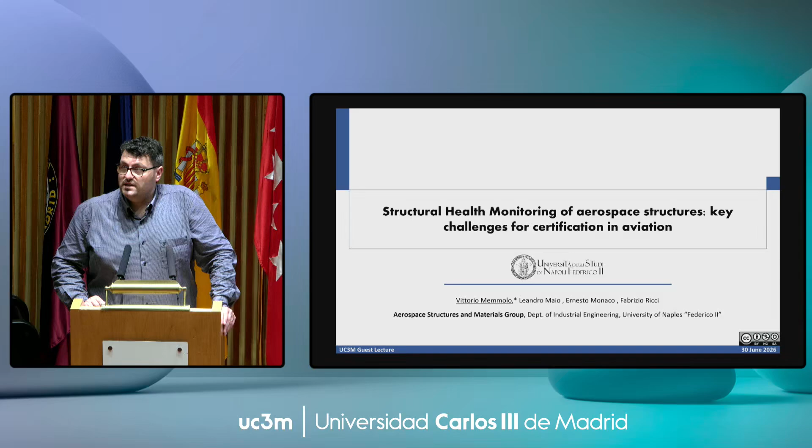I will basically touch on some of the activities we are conducting on SHM, structural monitoring, and I would like here also to give credit to some of my colleagues with whom I'm working for more or less 10 years. My intention is to move from first some methodological aspects to then put the accent on certification related challenges when we are talking about structural monitoring in aviation.

What I will introduce here is just a brief introduction about myself, the motivation for having SHM within aviation and specifically for the airframe, some approach based on guided ultrasonic waves, which is the methodology we mostly use based on ultrasound, some challenges for industrial deployment, specifically within a regulated environment like aerospace, before giving some concluding remarks and hopefully a brief discussion with you.

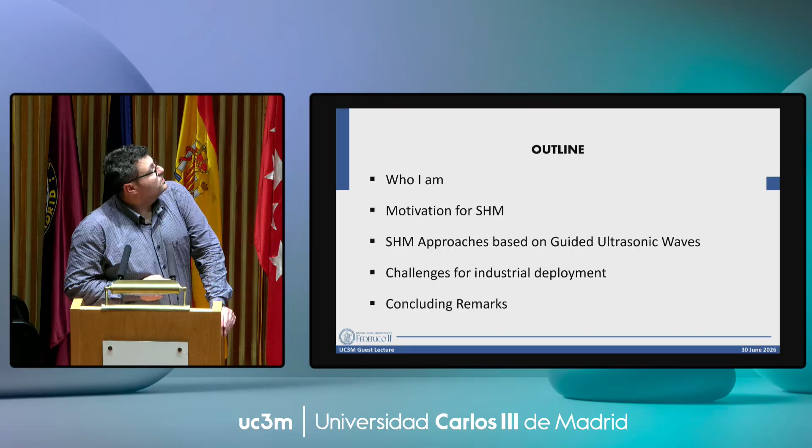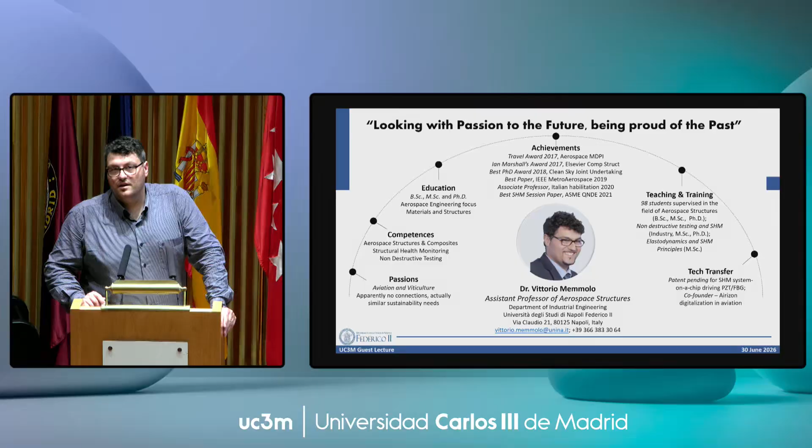Just about myself, as Alberto said, I am assistant professor in Naples. This is just a brief overview. I actually got my Bachelor of Science, Master of Science, and PhD in Naples. Then I traveled around a little bit, but I was mostly working there since 2013.

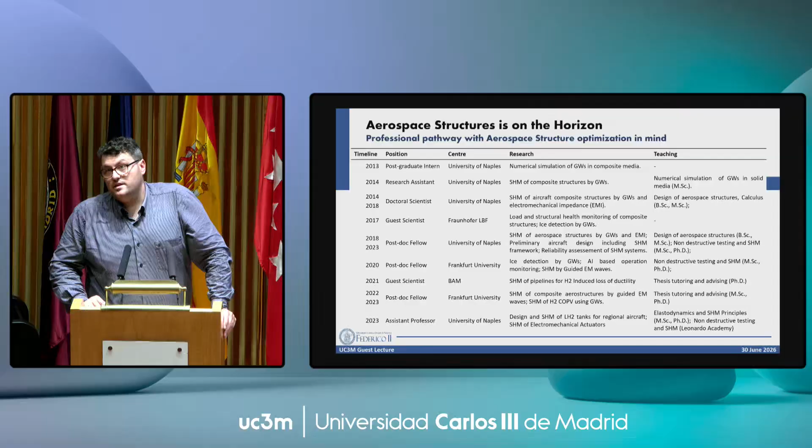This is basically my track, starting as postgraduate intern, research assistant, doctoral student. Then I moved to Fraunhofer for a while, back to Naples, then back to Germany. I am in love actually with Germany. I spent a lot of time there at Fraunhofer, Frankfurt University, BAM, which is a Federal Institute for Material Research, and DLR recently, which is not mentioned here.

This is actually an overview of what was my career related to SHM. Actually, the leitmotif is not SHM, but ultrasound. We started using ultrasound in 2013. Probably some of you are familiar with ultrasound for non-destructive testing. The concept is very similar, but adapted, of course, to having a system permanently connected and attached to the airframe.

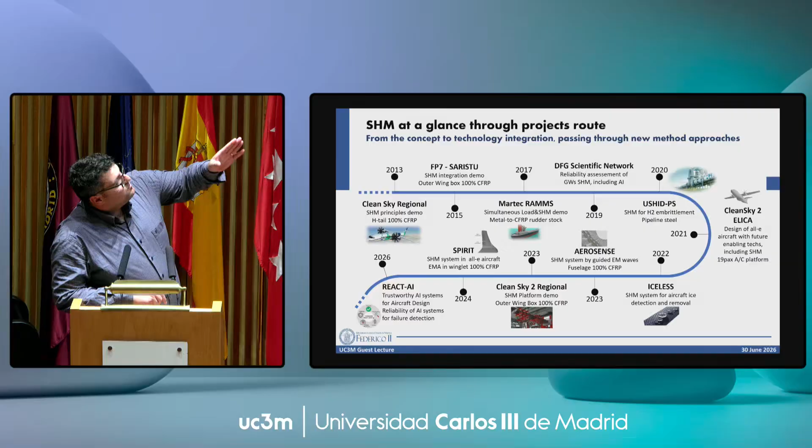We moved from some European projects where we tested SHM on a horizontal tail, full composite especially, applying also to maritime problems, and moving to hydrogen. Also for hydrogen, we need to monitor structures which are not specifically aerospace, but sometimes just pipelines, but still SHM can be imported there.

Then we extended our competencies using ultrasound, specifically actuators, for something a little bit more exotic, let me say, hydrogen production by water, so sonolysis using ultrasound as well. The process is very similar. You still use ultrasound to activate something in the structure, as we will see later.

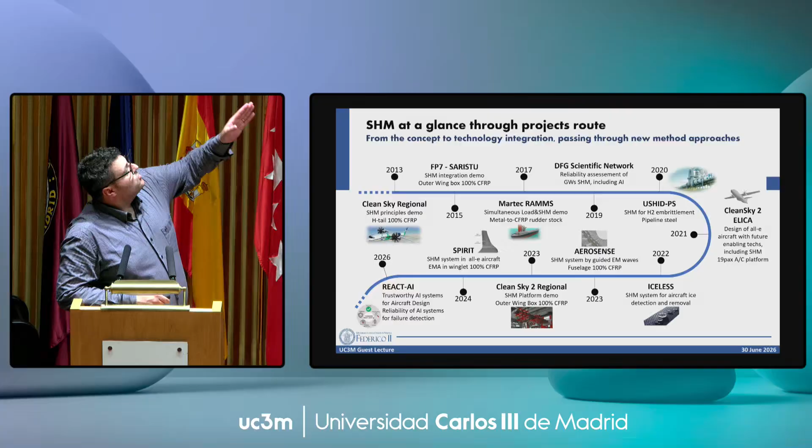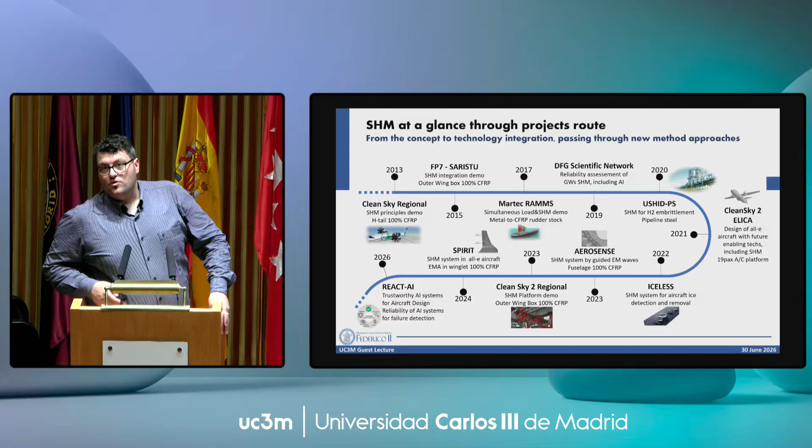And now we are moving to higher TRL, but also to making the system more integrated, which is the reason why the accent at the end will be posed on certification aspects, because whenever you want to increase the TRL at a certain point, you also have to qualify or certify your system. And of course, now we are going very deep into AI, which I will have to omit today, but if you have any curiosity, we can discuss further.

Why SHM? Structural monitoring is a little bit different from non-destructive testing. With non-destructive testing, the aim is to test a specimen, test a part of an airframe, for instance, and verify whether there is damage or not. This is usually already a scheduled maintenance activity.

Sometimes what happens, if we're considering a metallic structure, is that there is a crack, and the crack can propagate wherever and whenever you fly. You will fly in an aircraft full of cracks - I don't know if you're aware of that, but that's the reality. What's very important is to monitor the crack propagation, because otherwise the airframe could be unsafe. That's the reason why there are scheduled inspections.

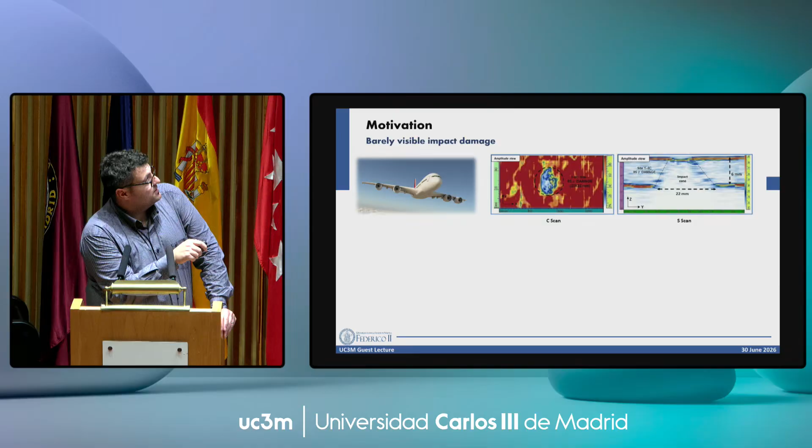The same happens for composites. Composites are more fatigue resistant than metallic structures for sure, but they are still very fragile with respect to impact. Whenever there is an impact, especially in the front part or on the lower wing panels, and if you have a composite, a non-destructive inspection based on ultrasound can show that the structure looks intact, but at that place, especially where there is an impact, there is a big damage. And if you inspect the composite through the thickness, there is a big failure.

So all the composite laminas are disconnected from each other. This is very critical because whenever you are supposing to work with a pristine structure, you actually have a big damage, and the residual strength gets much lower.

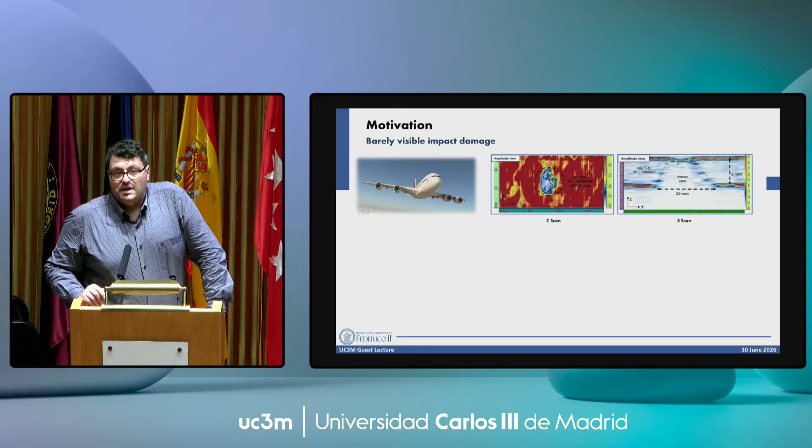This is the reason why non-destructive testing is very important, especially in damage tolerance design and maintenance philosophy, but it's very expensive. Basically, whenever you are designing, especially a composite structure, the damage tolerance approach requires that wherever you have a specific damage that can be detected in production, usually a bigger damage can be detected during operation in situ, which is much bigger than what you can see right after manufacturing.

Between these - the minimum detectable damage on site during the lifetime, and the maximum allowable damage - you need, by certification authorities, at least 2 following inspections, because there's always the possibility that you cannot detect the damage.

In addition, you have to demonstrate, especially for composites, that the capabilities after an impact like that, under compression, are still satisfied until ultimate load. And you don't need to have delamination grow between the 2 inspections we've seen here. Otherwise, you have to replace or repair the component.

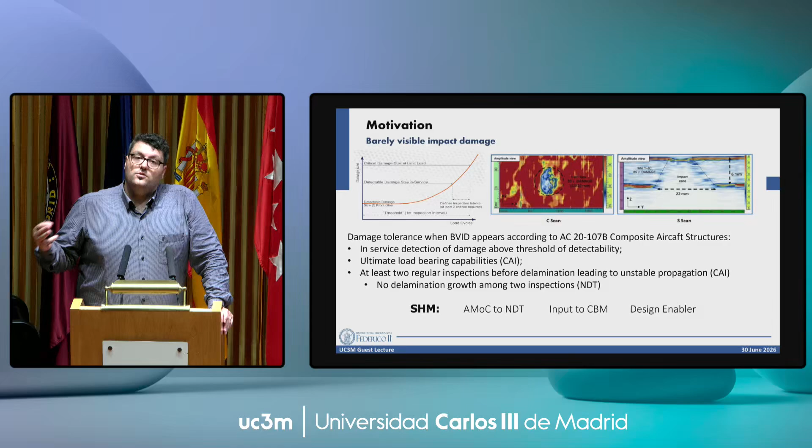This is very demanding from a maintenance point of view, and that's the reason why SHM comes into play as a key enabling technology. SHM can basically be seen as an extension of non-destructive testing, where instead of having equipment with which you inspect the structure, you have a number of transducers permanently installed on the structure, which are used to retrieve information about the actual structural state.

When we talk about SHM, we can use it as an alternative method of compliance to non-destructive testing, as an input to condition-based maintenance, or as a design enabler. Here, basically, we replace the NDT inspection with some SHM interrogation, so you use the data from the sensor to understand whether there is damage or not.

As input to CBM, basically, we want to move from a scheduled inspection approach to a predictive inspection approach. So you basically perform the maintenance activity whenever you actually know there is a damage or there is a high probability of having one.

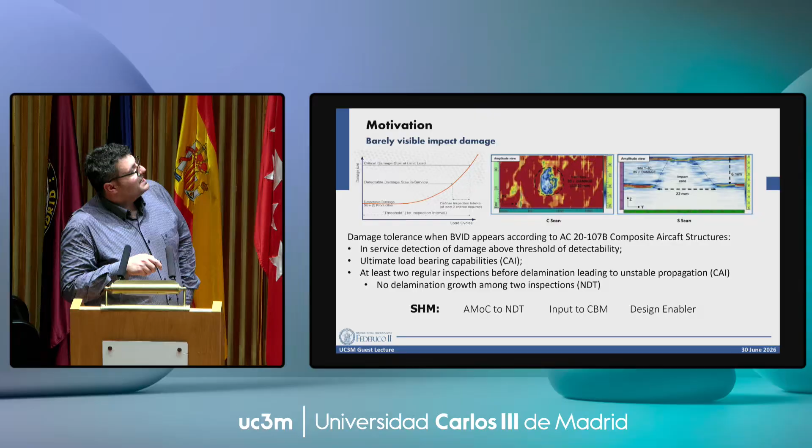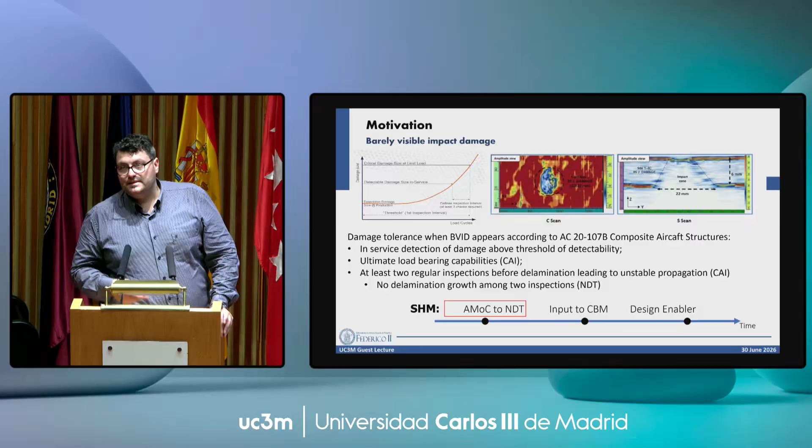As a design enabler - that's basically our dream for anyone working in SHM - the idea is to make the design of composite structures less constrained, because especially when we're talking about knockdown factors, it's very hard to deal with this type of damage, which are barely visible impact damages. Of course, design enabler is far from today, but today we are mostly discussing SHM as an alternative means, or a method of compliance to NDT.

Whenever we talk about maintenance inspection, we're usually discussing a very long process which starts from the captain or the first officer doing the turnaround around the aircraft to check if there's something that doesn't work. If everything is okay, then usually you fly. Otherwise, you ask for a level 1 NDI inspection, which is available at larger airports. If there's still an issue, there's usually a detailed inspection or detailed visual inspection.

If something is considered very risky, then you need a level 2 NDT inspector to come, and this is not available everywhere. When we move to this phase, as an operator we are already spending a lot of money before even understanding if we have to repair or we can release the aircraft.

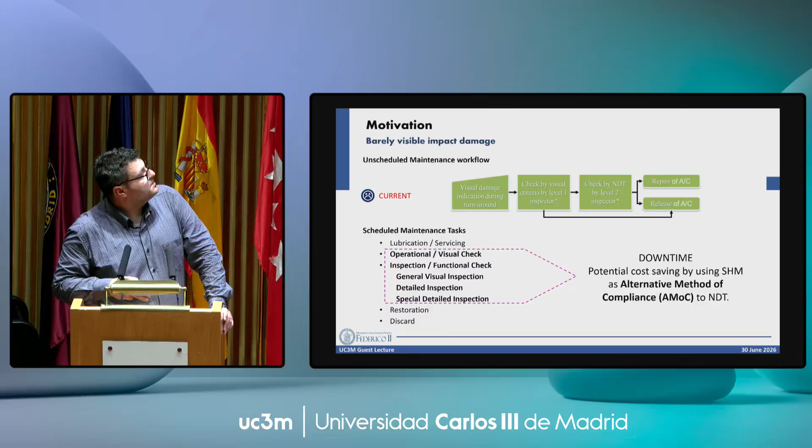All these aspects like operational visual check, functional check, detailed inspection, and special detailed inspection increase downtime a lot. Of course they produce a lot of downtime because the aircraft is on the ground, and this can be strongly reduced by integrating SHM as an alternative method of compliance to NDT.

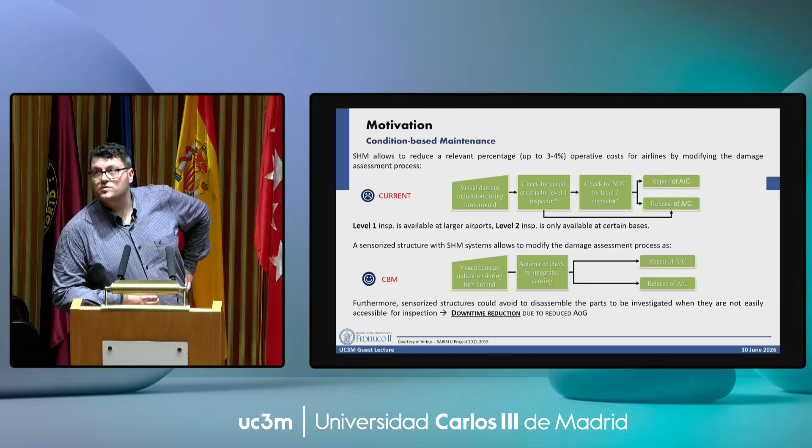The idea is to move to this maintenance approach to the second one, where we have basically an automatic system based on SHM that can, in an autonomic way, ask for repair or release the aircraft. This can strongly reduce the downtime by reducing the time the aircraft spends on the ground.

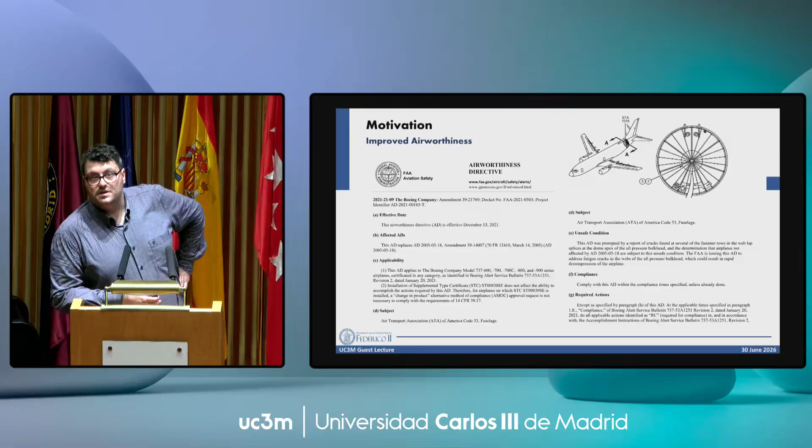When we are talking about SHM, we are not just talking about scheduled inspection or making the maintenance procedure more economical and cheaper. We are also talking about improving airworthiness.

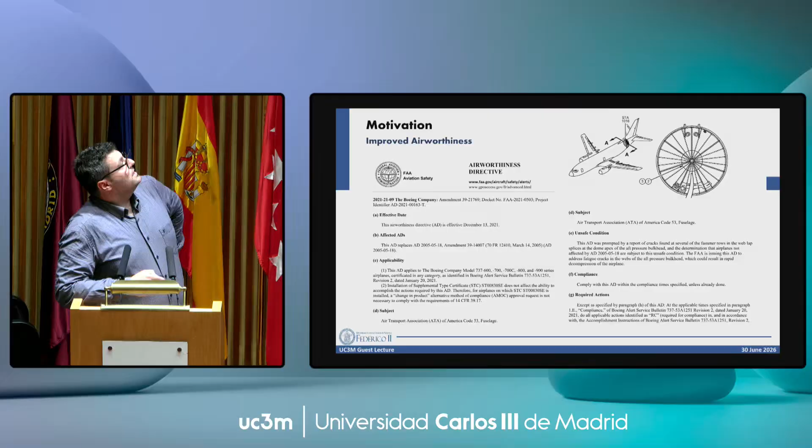This is an amendment to an airworthiness directive of the FAA for the Boeing 737, where they found a big problem with the pressure bulkhead on the rear end of the aircraft. Specifically, the bolts of the rear end were affected by unexpected cracks during the lifetime.

This means that whenever you have a possible crack that is increasing, you have to inspect the bulkhead. The problem was that the maximum crack dimension acceptable according to the certification authority was 1 millimeter, meaning you are below the washer, so you basically have to completely dismount the pressure bulkhead, which is very time consuming.

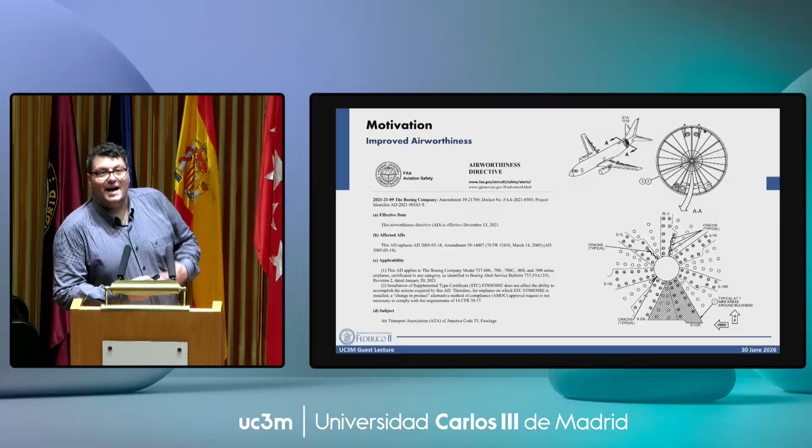Also for this type of application, whenever a specific problem isn't considered from the design stage, SHM is a good candidate as an alternative method of compliance. In this amendment it was mentioned, probably for the first time, to consider alternative methods of compliance to NDT, which reactivated the research activity around SHM in 2022.

What we have developed during the last year is basically a multi-level SHM, oriented to composite structures. The idea is that we can monitor the cause of any damage, which is the impact - so impact localization and event detection. We can more or less reconstruct and detect the presence of a damage, then probably localize it and try to assess the severity of the damage itself.

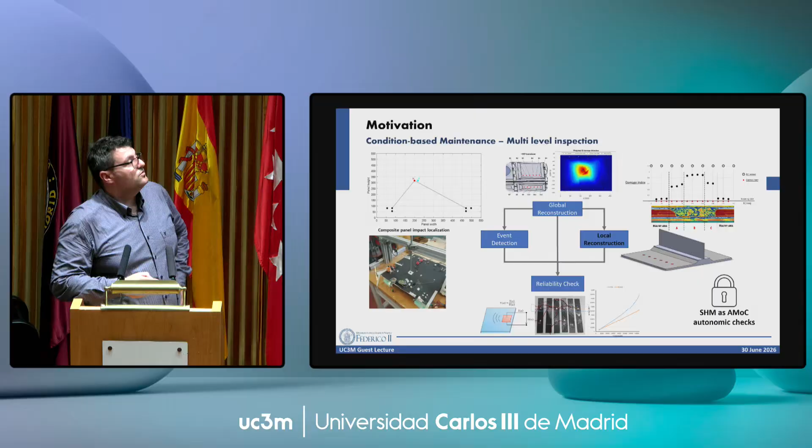We also check how the system itself is working, the SHM system, not the airframe. With all this in mind, you can say that SHM as an alternative method of compliance with autonomic check can be frozen around the methodology you have implemented. What I will show you today, before moving to reliability aspects and industrial deployment, is an introduction to a global approach we have developed and a local approach to size the damage that is occurring.

Without diving too much into details, but if you have any curiosity, we can discuss later. The first important aspect is why we use guided waves. Guided waves are elastic waves propagating across the material, and they propagate according to the properties and characteristics of the media where they are propagating.

So what usually happens: if you have a transducer attached to a structure, and another transducer that works as a receiver, if you activate a variable deformation over time at a frequency between 20 and 500 kilohertz - quite high frequency - you can excite an elastic wave. The elastic wave propagates through the structure and arrives at the receiver with a waveform like this.

So it's, first of all, multimodal - you have different modes of propagation through the structure. Specifically, we identify a symmetric mode of vibration of the structure and an antisymmetric mode, and then the waves themselves interact usually with the edge or with the stiffener, wherever a discontinuity happens.

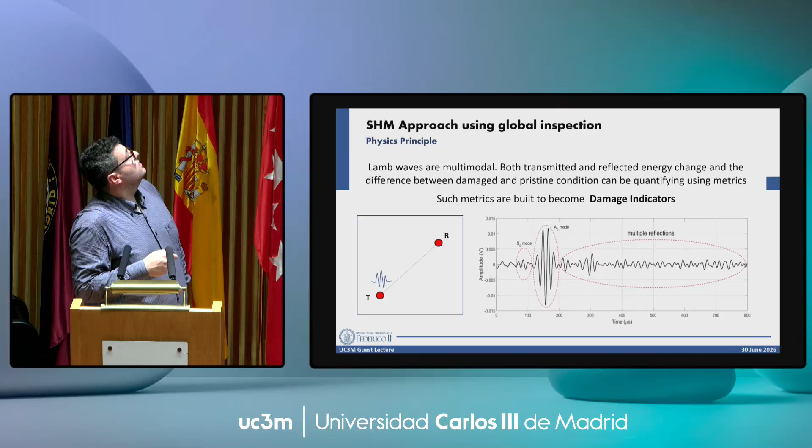When it's not expected, there is actually a variation over time of this time signal. This is what we actually monitor, not considering only a couple of transducers, but a certain number of transducers attached to the structure.

How can we work? We can disseminate the number of transducers. If this is, for instance, a plate, then you place a number of transducers, and whenever there is a damage in a specific location, the wave that is propagating and finding the damage, interacting with it along the line of sight, is actually altered.

What we do is, starting from the signals I showed you before, we make a sensitivity analysis. We try to understand how it works when there is no damage, to set a certain threshold, because there is noise. You need to know the statistical threshold you have to overcome to have a high probability that there is actually a damage.

Then we use a damage indicator, which can be based on physics, like the energy of the signal or the amplitude, or statistical, like root mean square variation, or correlation coefficient, and so on.

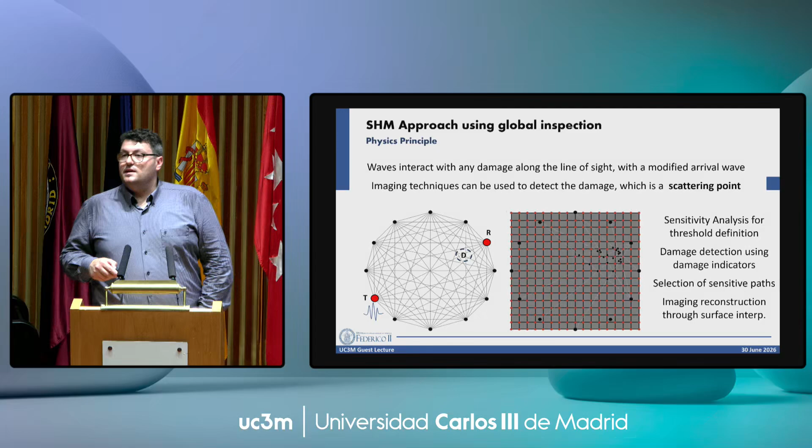Then we select basically all the paths among these that are really sensitive to a damage. And at the intersection of these points, we interpolate the damage indicators that we have found.

Another more local approach is very important whenever you have a discontinuity to monitor, like a stiffener, because the stiffener, especially when we are talking about composite, can detach from the skin. When it detaches, the capability to absorb a load, especially under compression, is strongly reduced. So it's important to also monitor the bonding.

You can use the stringer itself as a source of discontinuity by design, as I said before. So if you have a number of transducers alongside the stringer, you can use the reflection from it, because whenever you excite a wave at a specific point, the wave propagates in every direction.

Not in the same way, because we are talking about composite, but let's say it's propagating 360 degrees. There is a direct path going to a receiver alongside the stringer, and there is an indirect path that is basically mirrored, more or less, from the stringer itself.

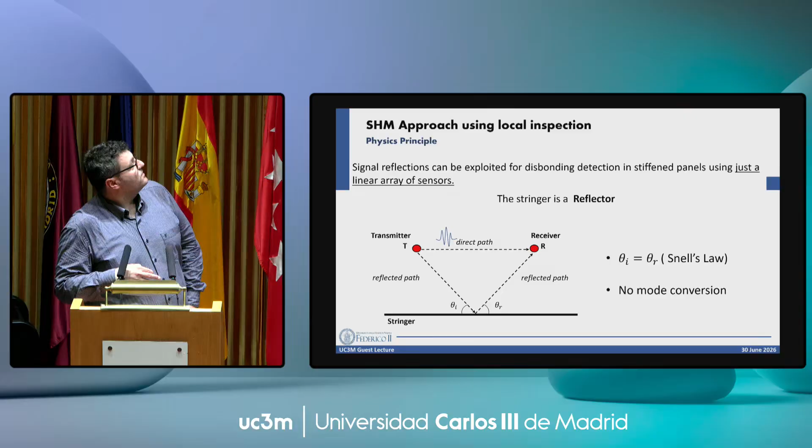If there is a specific condition for which Snell's law is valid and there is no mode conversion, the wave along the indirect path is really reflected from the stringer, really mirrored in the mid-plane.

What happens is: if you have a stringer like this, and you excite the wave that is going to interact with the stringer, and the stringer is correctly connected to the surface plate, part of the energy goes into the stringer and is then reflected back.

So if there is the stringer, what I expect is that part of the energy will be reflected back to the receiver. When there is a damage like this, you can see this is a simulation of a debonding.

The energy is basically flowing down, going on the other side. So what you expect is that if you excite from this side, most of the energy, almost all of it, is going to the other side, and there is no reflection back to the receiver itself.

If you can simulate a condition in which you don't have mode conversion, as I said before, there are different modes of wave propagation, and all these modes have different velocities and characteristics. But at some frequencies, if you have an antisymmetric mode, everything is reflected and transmitted as an antisymmetric mode.

You know exactly where to expect the wave reflected back to the receiver. So what you can do is basically something like that.

Install a number of transducers. Then if you have a damage, you monitor a certain number of checkpoints, which are the mirroring points, considering all possible combinations of transducers.

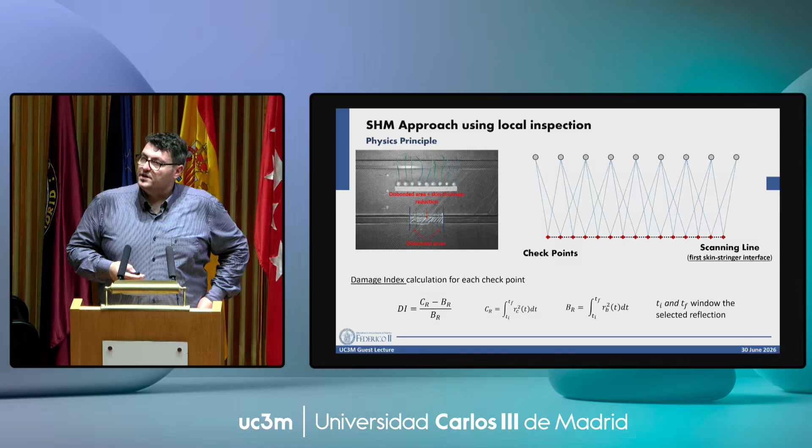You can window the time signal whenever you expect the reflection is coming, because you know exactly which mode is reflected back, and you can define a sort of damage indicator by comparing the energy of the signal that is expected to be reflected to the receiver itself.

Let's have a look at the results we got using this application. This is a demonstration from a European project called SARISTU, in collaboration with Airbus. The demonstrator is an outer wing box—specifically the lower panel of the outer wing box of a regional aircraft.

There are 9 different impacts. It's fully composite, and 186 piezoelectric transducers were installed on the structure.

Piezoelectrics are used to activate the wave, because whenever you give an alternating tension at ultrasonic frequency, you create a deformation of the piezoelectric material that is transmitted to the structure. The other way around, when used as sensors, as the wave propagates the structure deforms locally, and the piezo deforms, giving you a variable tension in time.

So here are a couple of results. First, we impacted a clear bay area, where we expect a delamination—the impact occurs and there is a very visible impact damage, which is a separation between different plies.

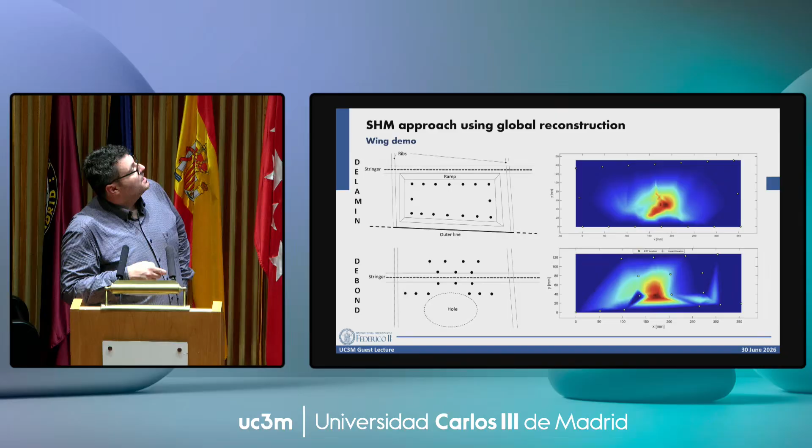This is the same case where we had an impact under the stringer feet, so there was a delamination that was also validated by non-destructive inspection. Again, you can correctly localize it using all possible combinations of piezoelectric transducers.

Let's move to the local approach. I already showed you this plate configuration, still full composite, for the same wing demo—but this time it's only a single part.

What we did was consider the reflection coming from the stringer, window the signal, and then calculate the damage indicator. On the right side are the results we got.

Up to this point there is a healthy area, and the damage indicator is very low—this is basically noise that we're measuring, below the threshold we found.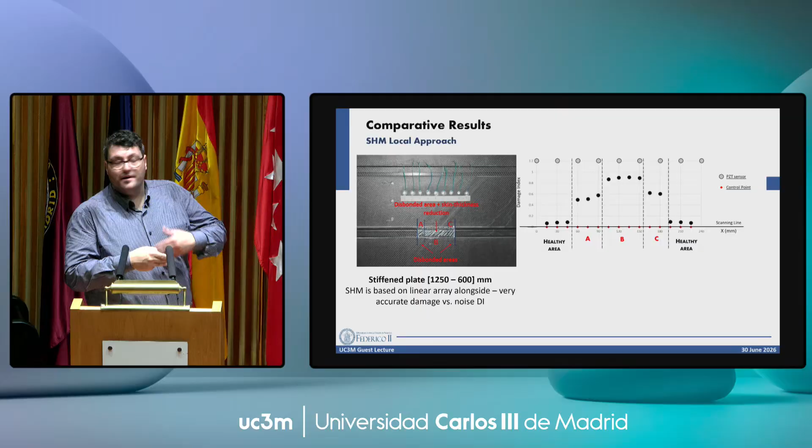Then there is an increase in the damage indicator in the area where there is a partial disconnection of the stringer, and it increases further in the central area where the bonding issue was very clear. Then the damage indicator decreases again.

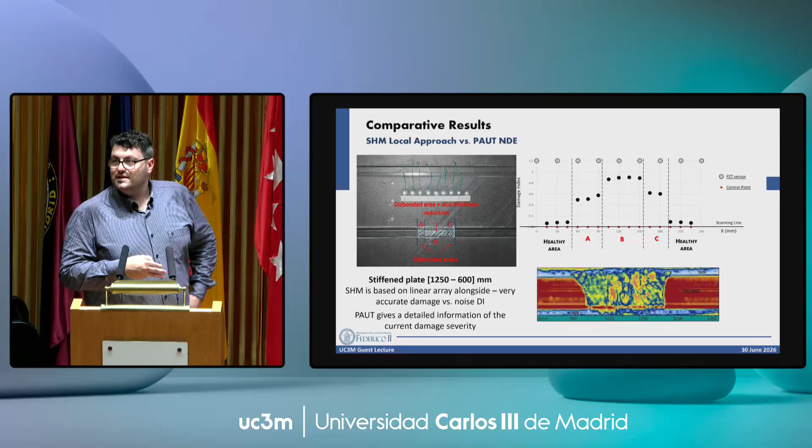We compared this with non-destructive phased array ultrasonic testing and got the same results. Of course, what we have is strongly different: here we have one measurement every 15 millimeters or so, while phased array gives a more continuous inspection. It's clearer, and you can really understand what's happening to the structure.

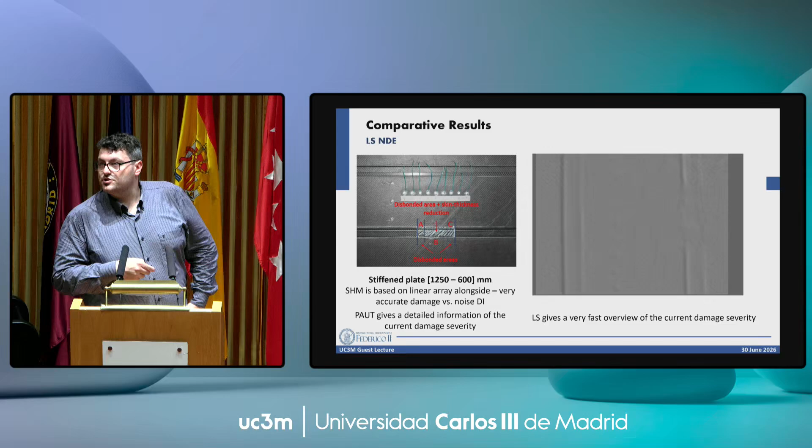Just a comparison to give you an overview of other non-destructive testing methods we considered. This is a shearographic image, which is very fast compared to ultrasonic testing, but extremely unclear—you can see a shadow indicating something isn't working as expected, but you can't really understand what's happening.

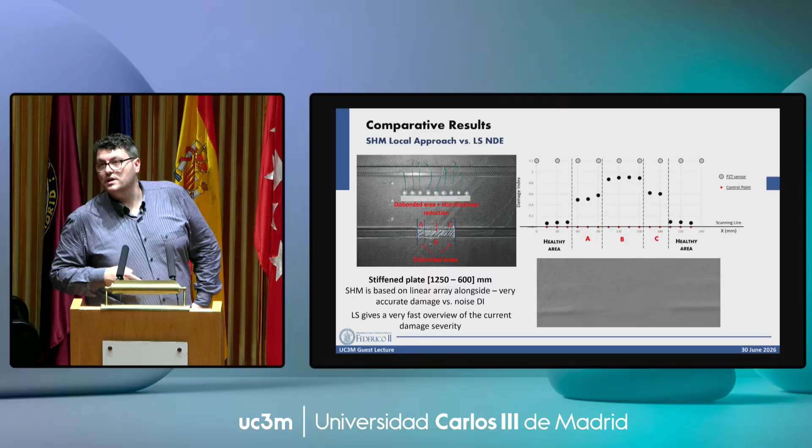Comparing SHM and shearography confirms the damage, but you cannot really realize that something is different in the central area the way you can with phased array ultrasonic testing. This comparison shows that SHM was able to correctly size the defect, but the uncertainty is totally different from NDT testing.

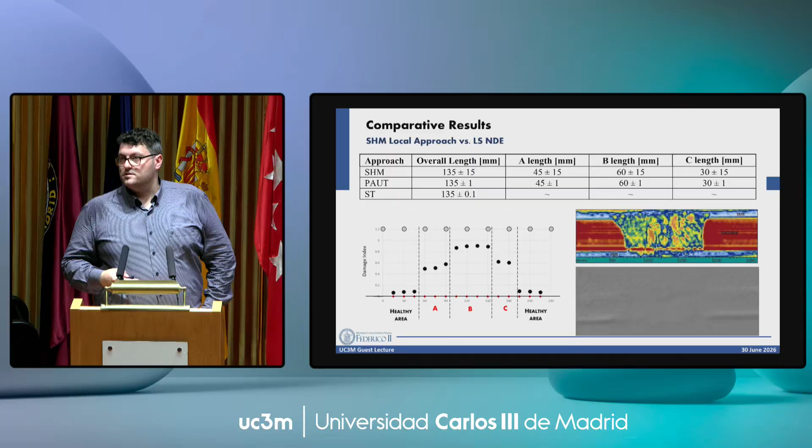So the metrics you have to use, and the way you use SHM, differ a bit. It's a good candidate as an alternative method of compliance to NDT, but you have to know that you cannot achieve the same sensitivity to damage detection.

The idea could be that we are discussing also with some OEM is to use SHM as an alternative method of compliance and also to trigger other NDT testing. What's the main challenge at the moment?

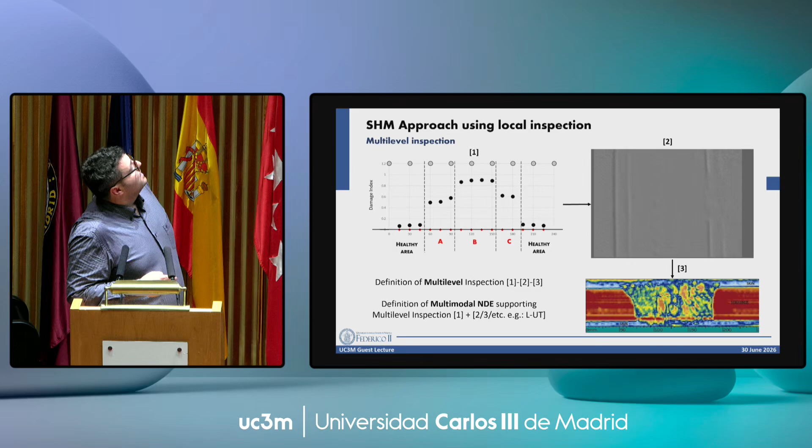There are a huge number of methodologies that we have developed, also moving towards AI. The point is that whenever you want to implement something like this, you have to characterize the performance of your system. This is one of the biggest challenges when we want to increase the TRL of our SHM system.

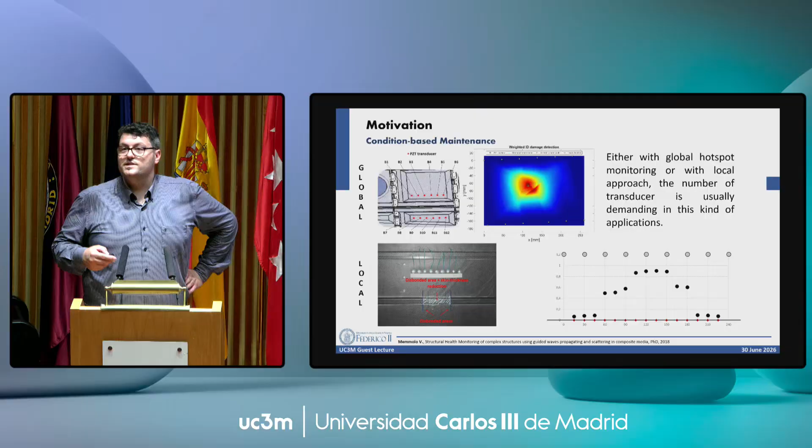First of all, you need a number of sensors. Whenever you need sensors, you need to add mass on top of the structure, which is not massless. Even if they are very lightweight, you need cables at the end, an impact on the aircraft design which is not very clear from the beginning, but you have to understand how your aircraft is working. This is a cooperation with the Flight Mechanics Group in Naples.

What we found is that if you add a certain number of transducers and a certain mass of SHM system, the increase in maximum takeoff weight is not properly linear versus the mass you are really adding on the structure, due basically to the snowball effect that probably all of you know.

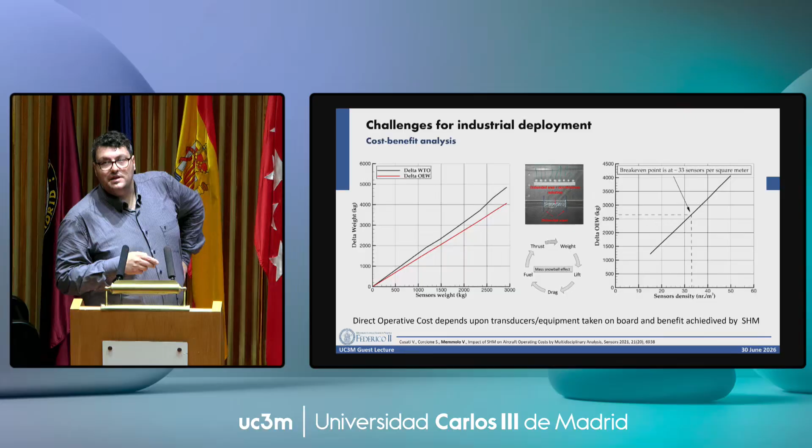That's the reason why we found out that there is a limitation to have a break-even point. If you consider that there is a benefit having SHM on board, there is a limit of transducers that you can use. Otherwise, it's not any more economically viable.

Also, as I said, when we are talking about performance, we are talking about performance of the aircraft, but also performance of the SHM system. And one of the biggest problems is qualification.

Whenever you qualify your NDT system, we started from NDT. Whenever you qualify, you are trying to understand the minimum detectable size of the damage, basically the standard damage that you can identify. Whenever we are talking about phased array ultrasonic testing, we are below 1 millimeter, so we are sure that we can actually detect very small damage.

What about SHM? Whenever we want to qualify an NDT, we have to consider that there is an inspector, a part of the area of the aircraft, and an NDT method. Then there are some variables we have to consider. When we are talking about SHM, it's a solution that is part of the system, which makes everything more complex. We don't always have the same equipment, we don't always have the same staff trained to work with NDT. So we have to understand how to use an approach well known as probability of detection.

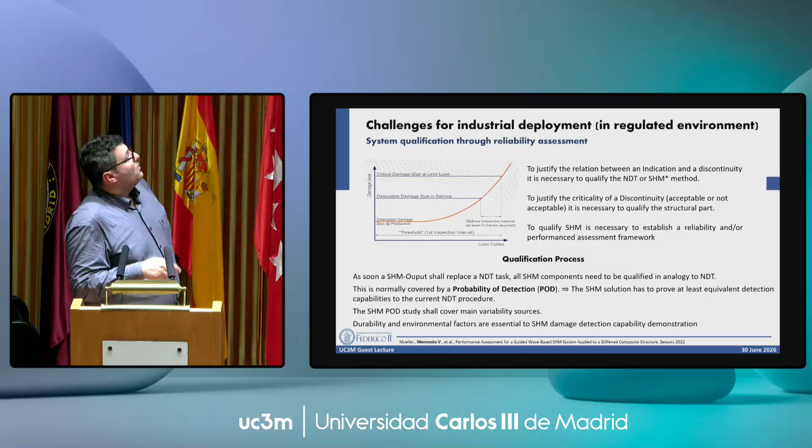I will not dive too much into the details, but basically you have to identify all the variability sources that you have. Whenever we are talking about experimental tests, we need to make some damage to a structure, which is not easy. You need a certain number of specimens to destroy every time and then test, which is extremely time-consuming and expensive.

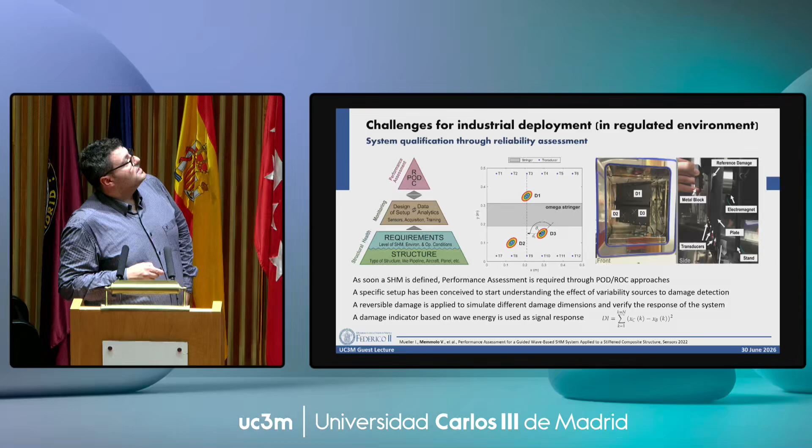So for this reason we did a particular experimental test, again a composite plate with a stringer with different damage location and damage size. This damage was reversible, so there was a metal block magnetically attached to the structure. We can simulate more or less in elastodynamics the effect of a damage within a climate chamber, with different geometry, different temperature. We try to compress some of the sources of data and variability, and then we use it again - the damage indicators are, let's say, the SHM metric.

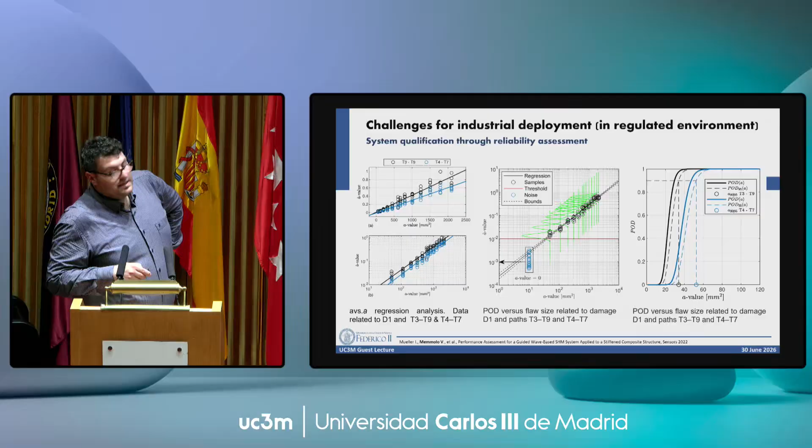What we found out is that whenever you increase the damage dimension, the damage metric increases, of course, but it strongly depends also on the path, so on the couple of transducers that you are considering. The approach is basically that you have to plot and make the regression as linear as possible, in linear scale, log-log scale, and then move to a Bayesian approach where you can understand the noise around the regression and build up the CDF curve, which is the probability of detection.

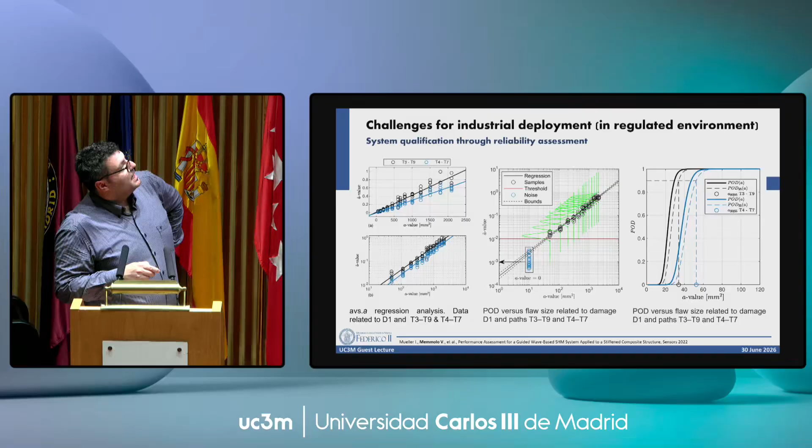On the probability of detection, you have to find the confidence level at 95%. Then you find the probability at 90%, and the intersection gives you the A9095. This is one of the standardized methods for NDT, and we are now transferring it to SHM to say, this is my minimum detectable damage with the system I have.

Of course, with NDT, you always have the same equipment. With SHM, you have a lot of variability coming from the structure. It's basically all depicted here: you have a system that can change every time, and then you have the performance assessment. Everything here is a source of uncertainty that you should elaborate. We try to elaborate some of them.

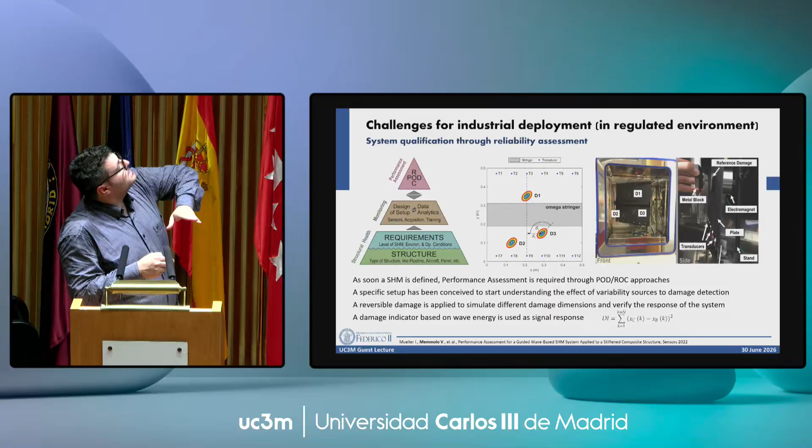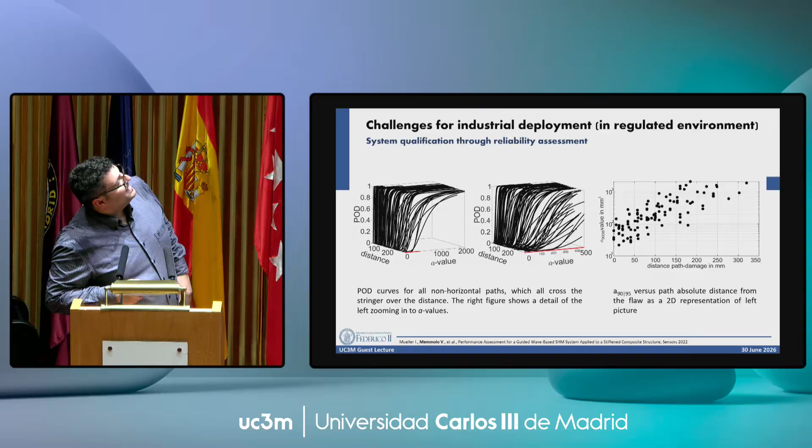What we found is that whenever you consider the distance of the path—so the couple of transducers make a path along the line of sight—there is a certain distance from the damage that you can see here, and here is the angle that the damage itself can make according to its shape. The effect on the POD is extremely different. This is a zoom in, and if you look at A9095, it's distributed according to this distance from the path to the damage, which makes it extremely difficult to qualify, because you don't know exactly the minimum dimension of damage that you can detect.

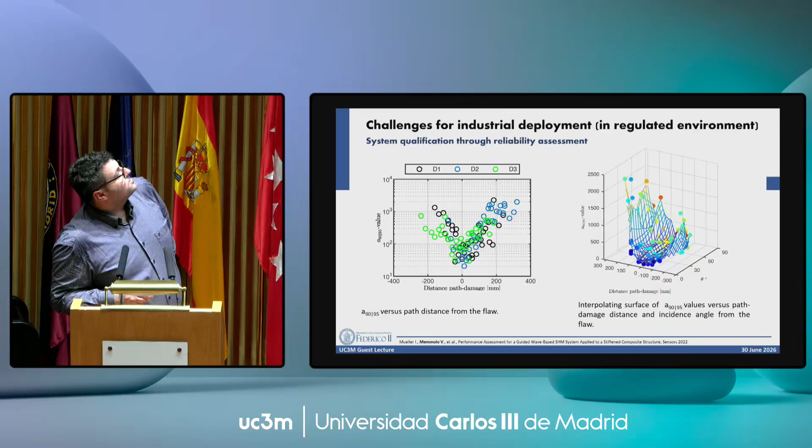Again, when considering path-based analysis, you have the distance, and this is highlighted by the different damage cases we had at the beginning. There is a dominant effect of the distance. Here there is also a representation for theta, but there isn't much actual effect of theta itself.

Just to conclude, I know this was very fast and not very deep, but we can discuss later. SHM is a means to detect and quantify, from a permanently attached system on the airframe, if something is happening in the structure, if something is changing—something meaning something dangerous, related to damage.

Detecting damage using SHM based on guided waves is quite efficient. There are a lot of methodologies, and as I said, we're also moving towards an AI-based learning approach. But it's very important to understand how to qualify these systems to make them, at least for the short term, an alternative method of compliance to NDT. The general POD analysis, which is what I showed you before, requires a big effort in showing how we can understand the minimum dimension of damage that we can statistically detect.

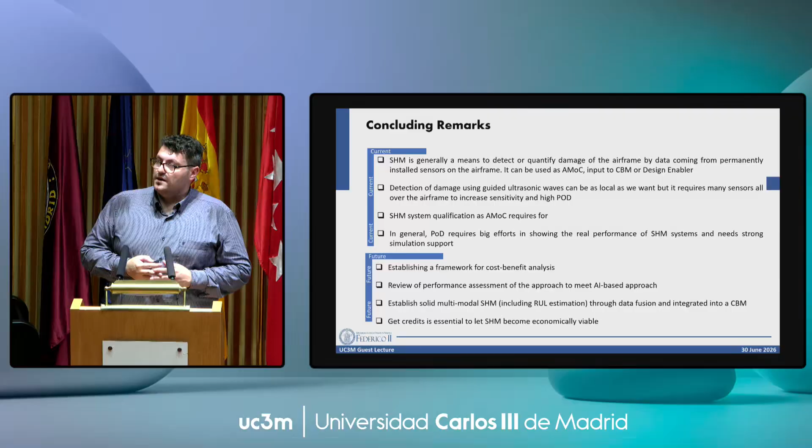It's extremely important to establish a framework for cost-benefit analysis. I'm part of a SAE committee on structural integrity. Still, FAA and EASA don't want to give credit to anyone using SHM on the aircraft, which makes an SHM solution not economically viable. We have to understand how to evaluate the economic benefit, and have a solid performance assessment approach where I know all the uncertainties playing around SHM, and how they can be qualified or quantified to make the qualification of the system itself.

That's all from my side. I know I was very fast and didn't give a lot of details, but I wanted to show how we have to move in this application, from the methodology to the certification aspect. Otherwise, wherever we apply something on the structure that cannot be certified at a certain point, it becomes only scientifically valid, but not applicable. Thank you very much.

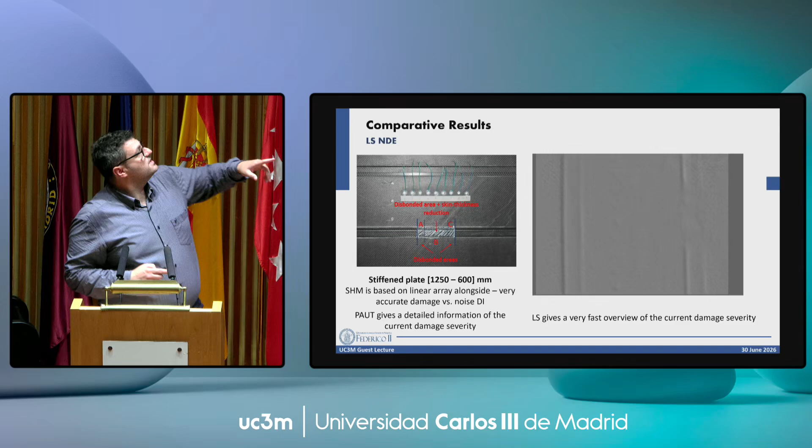What you delivered today, or some of the damages you showed, and how we can predict them by these waves, was mainly delamination, but a visible delamination, like the one on the stringer joint, on the stiffener. Yeah, it's okay, I get what you mean. This one, I guess? No, I think it's maybe one or two. So this one is probably this one, because in principle they are not visible.

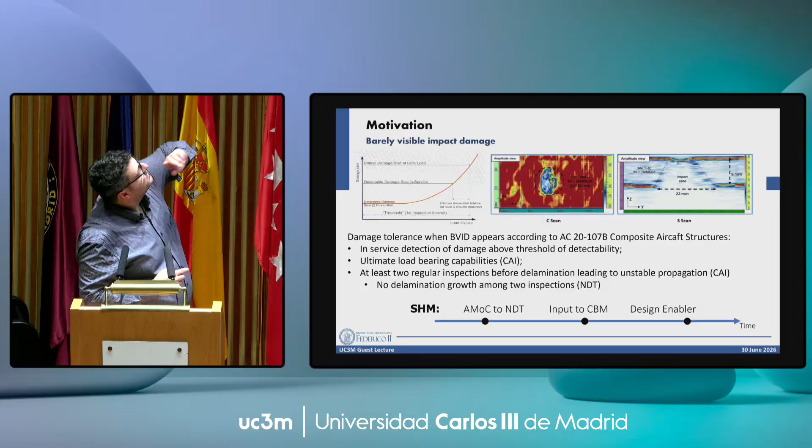This one? No, I think it's ahead. The stringer, so the stringer. Yeah, the one with the simulation, the contour plot. Okay, this one? Yeah, oh okay. Yes, this is a simulation just to understand the physics behind it, because we wanted to understand what happens if I have a debonding.

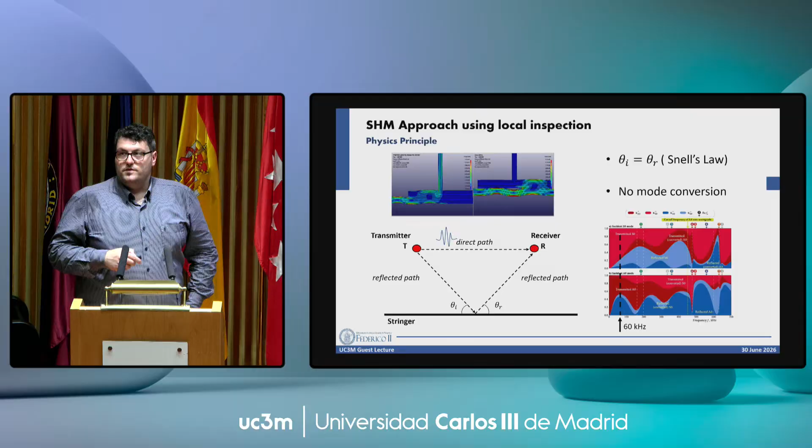And what we found is that basically part of the energy that was expected to be reflected is actually flowing through. So we know we will miss energy reflecting back to the receiver if we have stringer debonding. But in principle, all this damage is non-visible or barely visible. It means usually you have an impact from this side. You know there is a debonding because we are talking about the specimen, but if you are on the wing box, for instance, you cannot see anything.

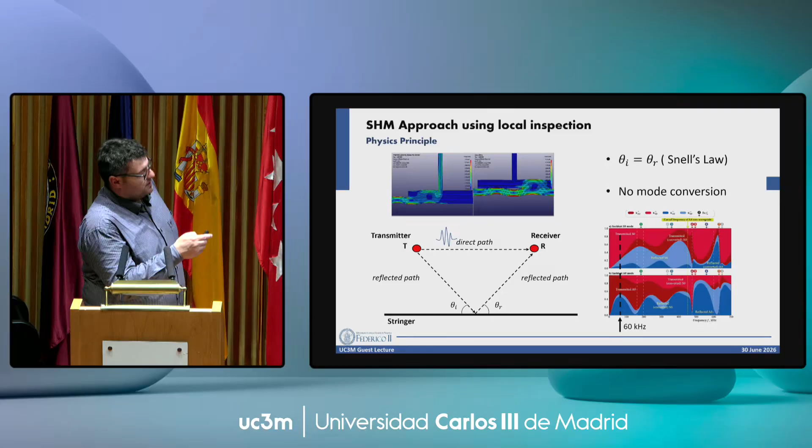And we found, when opening the wing box, this type of debonding also here, for instance, if I remember, not here, not here. You see, especially when the impact occurs under the flange of the stringer, there is really a debonding that, if you could open the wing box, you would see very clearly that it's disconnected. There is really an area where it's not connected.

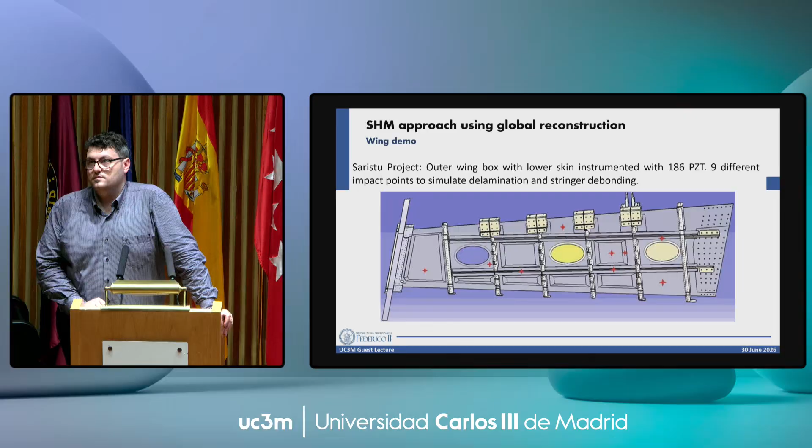You can see it with phased array ultrasonics, but the most important issue is that if you know there was an impact and you touch that location, you see there is an indentation, but it's only between 100 and 200 microns, which means that if you just have a look, you cannot see anything. Even the painting would not be removed. So in principle, it's defined as barely visible, but I would say it's not visible unless you are a really expert inspector.

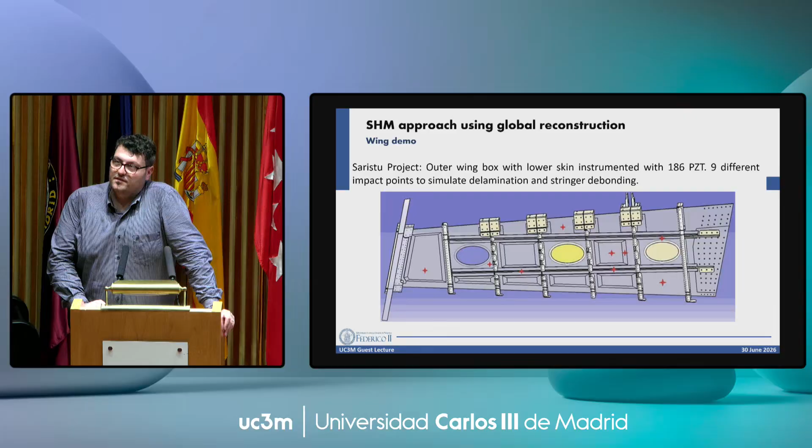Okay, my question was pointing more towards trying to ask what could be some possible applications or enabling technologies that could allow us to do SHM at an even more microscopic level. So if you are envisaging some kind of technologies, like embedded fibers or something that could produce that capability.

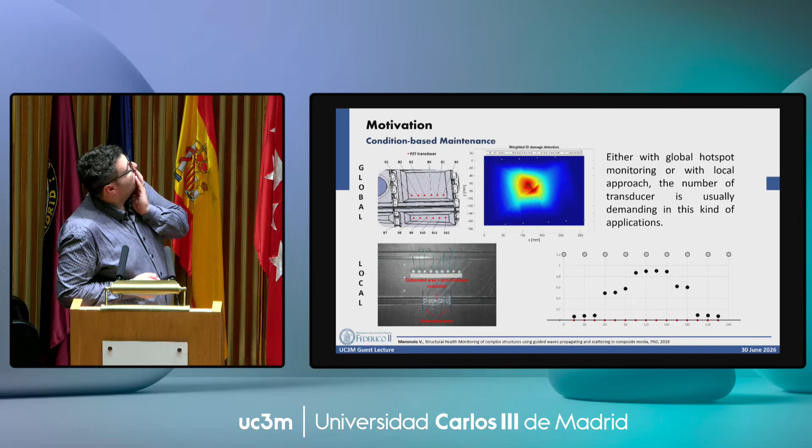I got what you mean. I would say not for aerospace. I don't think there is this.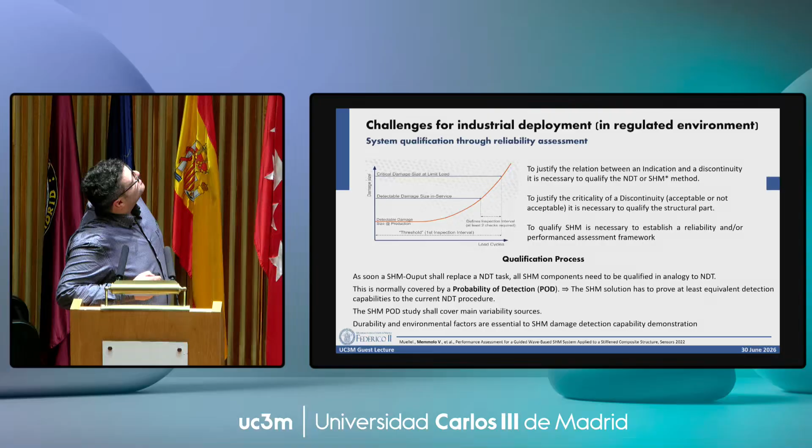If you consider this picture, this is basically the minimum detectable size at production. It means that everything below this damage size is somehow accommodated by safety factors. So from a scientific point of view, it is possible. From an engineering point of view, at least in aviation, according to the certification authorities and the means of compliance they ask, it's not so important, because during certification you have to demonstrate you can bear the ultimate load having a barely visible impact damage. They expect there is a detectability limit below which you cannot see the damage itself.

We are now working in that direction, having more of a look at the microscopic damage itself. But I must say this approach will never fully work because it's a linear elastic waves based approach. We are moving to a non-linear approach, because with linear elastic waves we don't see anything related to non-linear propagation, which is usually affected by grain size differences in the material, embrittlement, or anything really microscopic. With this type of elastic wave, you cannot really see a difference when you have microscopic damage.

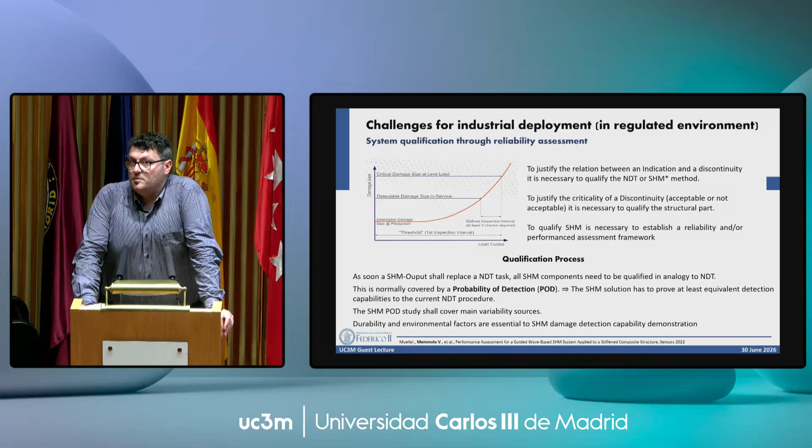But if you have microscopic damage, like one of the biggest problems now, hydrogen embrittlement, we still consider guided waves, but non-linear ones. It means the way you activate the ultrasound is a little different, and you check: if you excite at 100 kilohertz, for instance, you look at 200, 300, the higher frequencies, to see if something non-linear is happening in the material. That's one of the few approaches that works for very, very small damage.

Otherwise, with linear waves we really need a discontinuity, because if there is no interaction with the damage... The rule is usually that you can detect half of the wavelength of your wave propagation, so we are talking about 5 to 10 millimeters. Below that dimension it's a little bit hard.

Thank you. I'm sure we can discuss later a little bit more on that. Okay, any more questions? Okay, maybe just the last one.

Thanks for your presentation, I have one question. We have a transmitter and a receiver, sending the signal. But can temperature or the homogeneity of the material affect the signal received on the other side, for the receiver? How sensitive is this approach to these parameters?

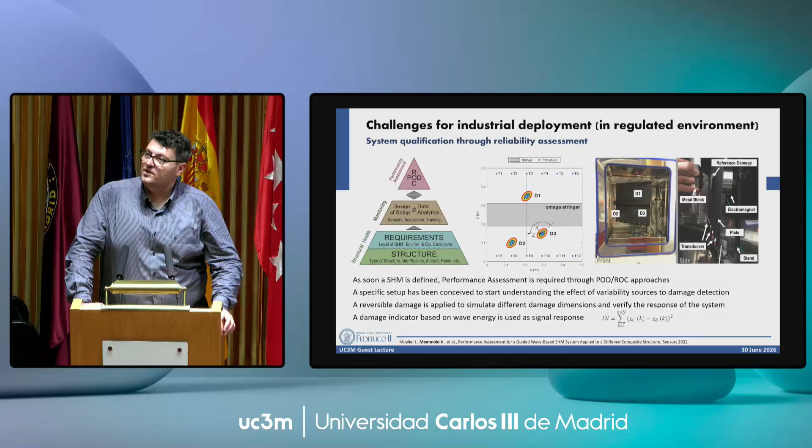The error you get has different possibilities for compensation: either you have a database according to temperature, or you try to interpolate among the different temperatures. In principle, the idea is you always have a baseline, an interrogation where at different temperatures you also have a temperature sensor. Pressure has an effect too, so pre-existing load — if I'm testing the structure at a different load condition, there is still a phase shift and an amplitude shift. The only way is to compensate. There are different algorithms based on stretching of the signal that work, or AI-based approaches as well. Learning approaches work very well for this.